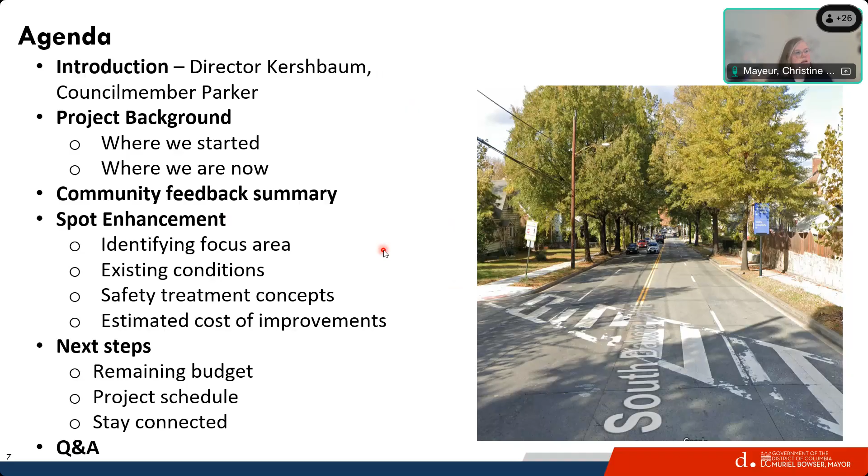We will have a public meeting—if you'd like to come in person and discuss some of your comments there, that will be Saturday at Perry Street Prep, from 10 a.m. to noon. Same presentation in the morning, but we're going to keep it a little bit shorter so that we give people more time to speak at each of the boards and look at the information in detail.

So where we started: in FY24, Councilmember Parker earmarked local capital budget funds to develop specifically a road diet, and recommended two segments that DDOT look at. Through conversations with the council member in fall of 2023, we recommended to study the entirety of the corridor for the feasibility of a road diet, considering that we had $1 million from that initial fund, and then received another $300,000 in FY25.

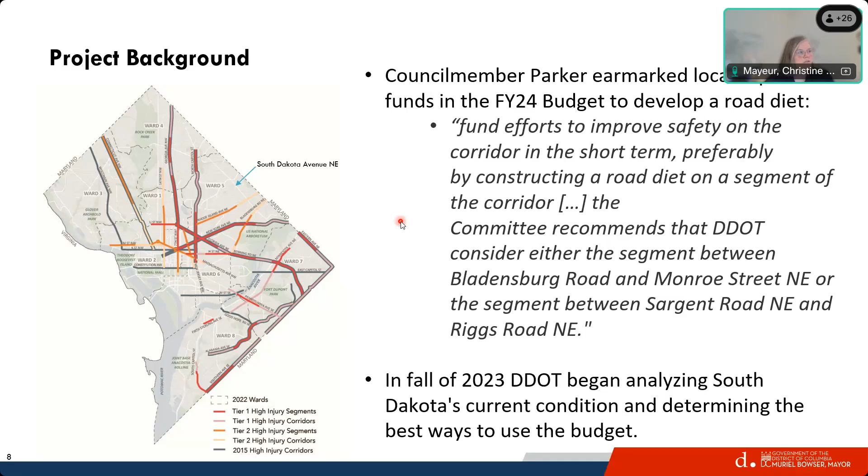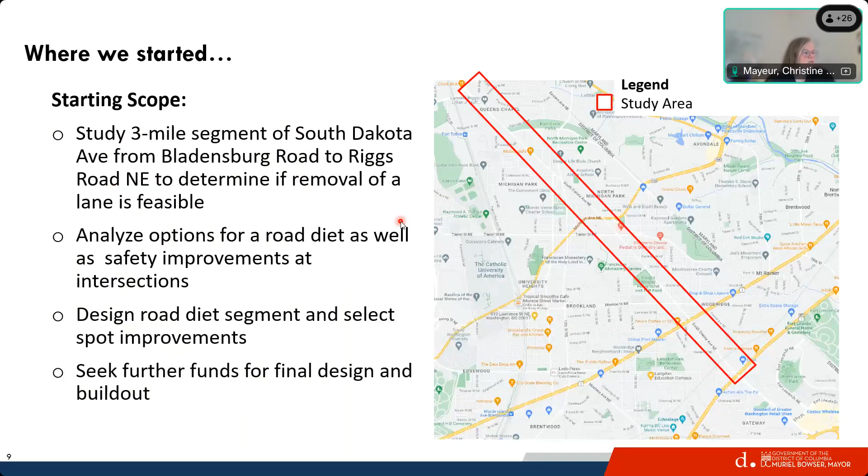So where we started was to study the entire three miles from Riggs Road all the way down to Bladensburg Road, to determine if the removal of a lane was feasible—to look at the road diet options for repurposing that space, then design a road diet for that segment and spot improvements, and then seek further funds for any further build-out.

However, things have changed. There's been a lot of disruption with DDOT's budget and DC's budget overall, so there are no additional funds coming to this project. We had to pivot to the best options and best outcome for this project, and really focus on spot improvements. We did finish the road diet feasibility study—we covered that in our phase 2 public meeting, and that recording is on the website as well. So if you'd like to hear more about that, we won't go into detail tonight, but we will be focusing most of our time on the spot improvements and how we can use this additional $600,000, or the remaining budget of about $600,000 that we have for this project after we complete this phase of the study.

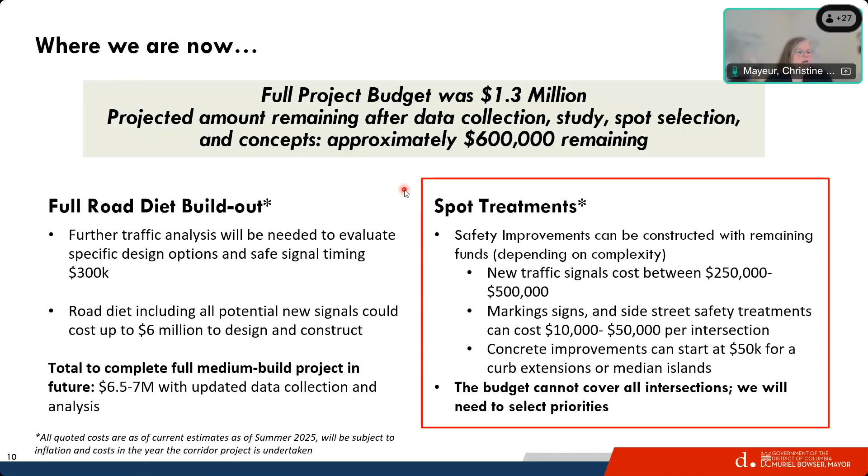So throughout all the feedback we've gotten from you all, we've received over 2,000 comments—about 850, and even more at this point I think, on the interactive map. Over 1,200 comments on feedback forms, 75 additional letters, and 144 responses on our top safety improvement spot location survey that we had from last time.

So overall, there was a strong demand for traffic calming and measures to improve safety, with speeding being a major issue, and a lot of people commenting on crash frequency and the risks of the corridor.

Pedestrian and bicyclist accessibility, the need for better sidewalks, crosswalks, intersection safety, concerns over how drivers are behaving when they're behind the wheel traveling on South Dakota and through the neighborhoods to get to South Dakota. Crossings feel dangerous for people walking. We looked at some solutions there for better visibility, signalizing intersections, or studying for signals. At first we were considering protected bike lanes, but that's no longer on the table for this project.

People had a vision for a multimodal corridor. We heard a lot of people wanted more sustainable features with the corridor that focus on pedestrians, on cyclists, on transit users, on trees and streetscaping and things like that. Many were envisioning South Dakota Avenue as a healthier urban place that supports many travel modes.

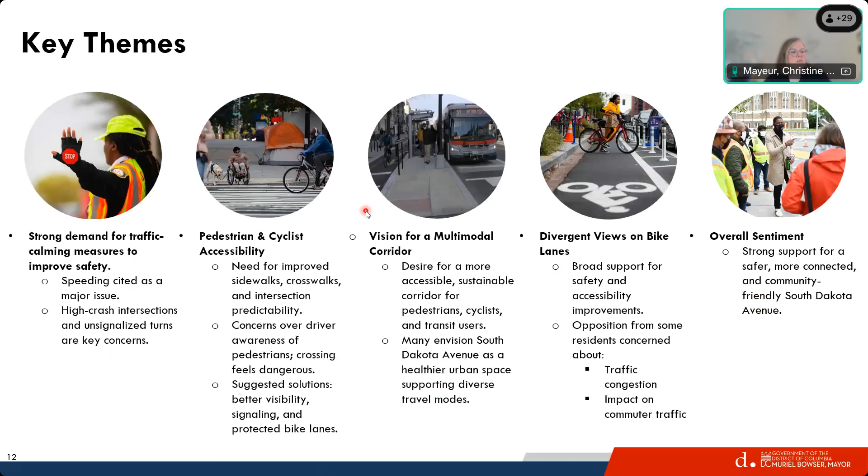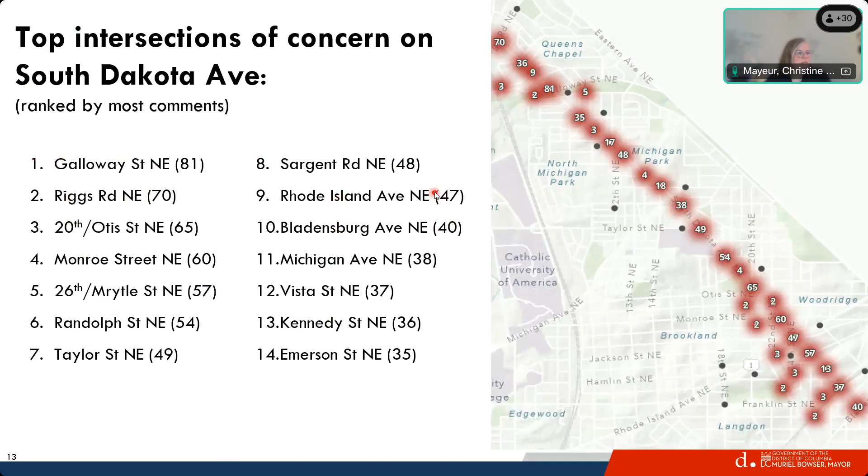From the interactive map that we launched at the beginning of the project, we saw the top intersections here - these are the top 14. Number 1 was Galloway with the most comments, then Riggs Road, and then some of these others. Bladensburg and Rhode Island Avenue are our high injury network intersections. Those didn't receive as many comments, but the ones that we got recognized that it felt very dangerous to operate through there.

So how we've used this information that we've gotten so far - we've looked at the comments that we've gotten from you all, crash data, and collected all new data from beginning of this year, before the government shutdown, to determine our spot location priorities, looking at selecting countermeasures to address the issues that you all have noted and also that we've seen from our data, and analyzing those spot improvements for even further prioritizing those locations.

Because we only have $600,000 left for this project, we won't be able to get to even the ones that we show you, all of them. We won't be able to get to all of these locations with this budget, but we will get to as many as we can with the budget that we have, and then await future budget to build the rest.

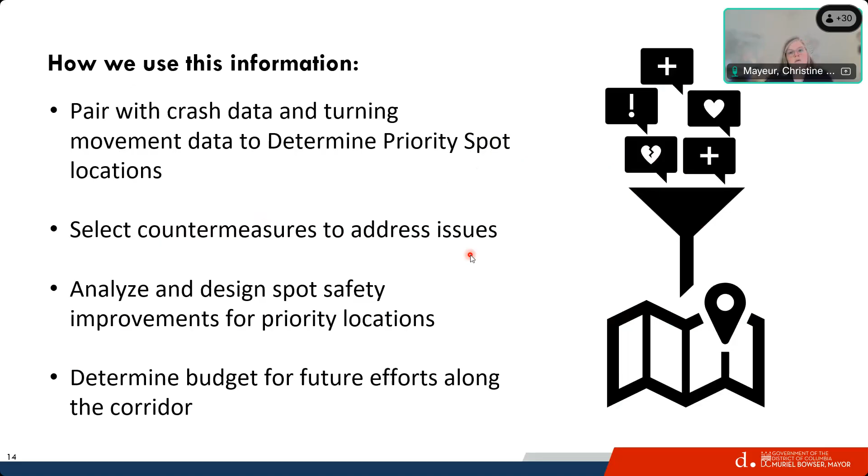So with that, I'll get into our spot enhancements that we have been looking at. We identified these focus areas - if some of you attended last time, we identified multiple. We're going to focus on our top 5 locations since then.

So prioritizing high injury network intersections - these are the locations where there's a demonstrated history of many severe and fatal crashes. Really, if we can improve safety there, that goes a long way for the corridor as a whole. Intersections with high crash rates based on recent traffic crash data. School zones, especially around Perry Street Prep, Sojourner Truth School in the middle of the corridor.

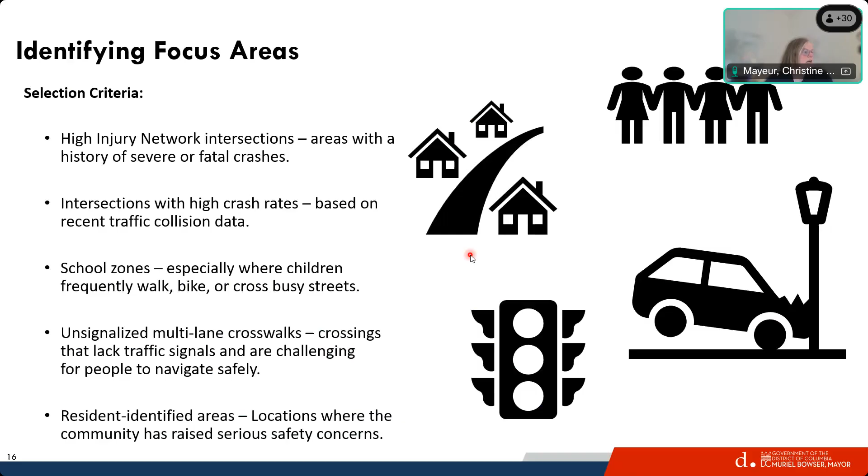Looking at crosswalks that have been unsignalized, that are uncontrolled, but still cross all 4 lanes of South Dakota, or 6 in some cases, and any locations that you all told us were priorities, like Galloway and Gallatin.

So these are our top, in order of priority, focus areas that we'll be covering tonight. The top one is this intersection here, number 1, with a short segment from Bladensburg all the way up to Hamlin Street, from Rhode Island up to Lawrence Street. Then we go up to Webster to Taylor Street, this segment here around Michigan Avenue. Our number 4 priority is around the school from 18th Street down to Otis. And then our 5th priority is Galloway Street and Gallatin up here. So I'll go ahead and walk through those in order of priority.

So we'll start with Bladensburg to Hamlin Street. This is existing conditions and a summary of what you all have told us so far, including any of the data that we've looked at and evaluated for the project. In blue is what we've found from our observations, from our data. In orange are things that you all have noted on our interactive web map.

So here we saw a lot of crashes around Vista, a lot around 30th and down at Bladensburg and Franklin as well. This one down here, Bladensburg, is a high injury intersection, really high levels of volumes turning at this intersection.

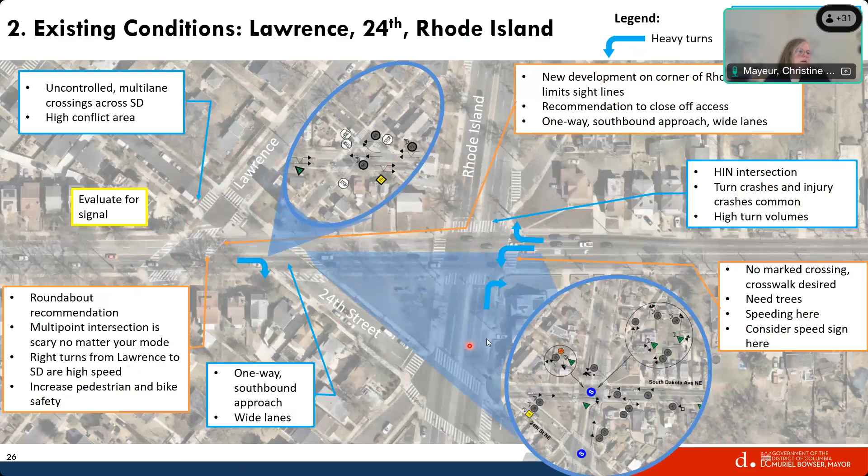So looking at also Rhode Island, any new developments that are coming in, safety of the intersection down here at Rhode Island as well.

So what we came up with for Lawrence, 24th and leading down to Rhode Island, but we'll focus Lawrence and 24th right now, is really trying to manage access across, especially uncontrolled turns across South Dakota, which lead to pretty severe crashes for drivers especially, but also for others. So preventing left turns here with a striped median.

And some flex posts lining the entirety of that median space. You can still make the right turn up here as existing conditions, northbound South Dakota Avenue up to 24th Street. But you would not be able to make the left turn out of Lawrence on either side. And you wouldn't be able to make the left turn from South Dakota onto Lawrence either.

For 24th Street southbound, we're looking at adding curb lane or parking lines to really reduce the visual width of the roadway and hopefully help reduce speeds for people making the right turn from South Dakota south on 24th Street.

Again, here at Rhode Island Avenue, treatments are a little bit lighter, but visually narrow 24th as you come through. A lot of residents complained about speeding here, and we observed it as well. And then down on the northbound approach to Rhode Island at 24th, enhancing the visibility of that intersection with daylighting as well, reminding people of the speed limit here.

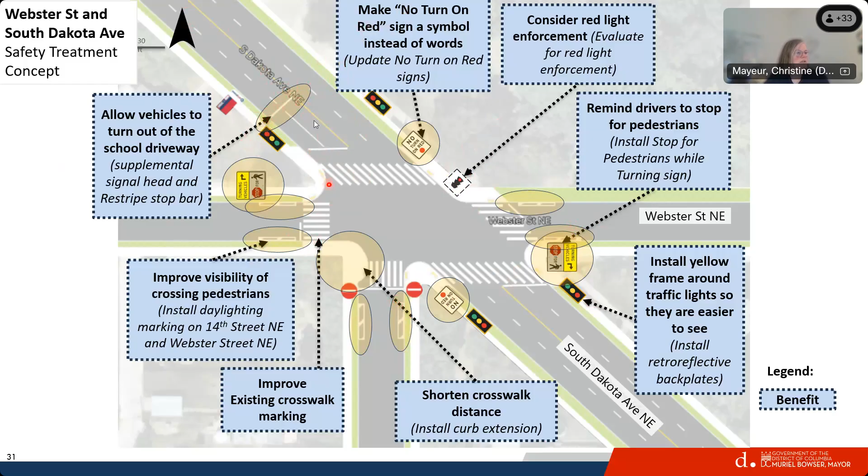And then another one here is the driveway that comes out of the school, adding a supplemental stop bar so drivers coming southbound know where to stop appropriately. And then the folks coming out of the school have some space to get into the southbound queue to get through the signal there.

For Michigan and South Dakota, we've got a couple of recommendations here that change things up due to all the comments that we received. The main thing is to close off the 16th Street slip lane. So you won't be able to make that shorter right turn here. We will close that off, and then you'll be able to make the right turn at Michigan and South Dakota.

But that also means 16th Street, we were recommending to one-way that away from the intersection. So if you're going northbound, you can still make a right turn onto 16th Street, but you won't be able to make a southbound left to get onto South Dakota. You'll have to go up to Webster, and we're hoping to point people to signalized intersections to make these turns.

This will also simplify the intersection so that we see fewer crashes and it feels safer for everyone out there. We're adding a leading pedestrian interval, where pedestrians get a head start across the intersection. And if we're one-waying this location, we're looking to reconfigure and remove the traffic light here.

At Taylor and South Dakota, we came up with two concepts. This one is a lighter touch, really focuses on visibility treatments, giving pedestrians more time to cross, no turn on red, switching out the signs to make sure they're very readable for everyone, and reminding drivers to stop for pedestrians.

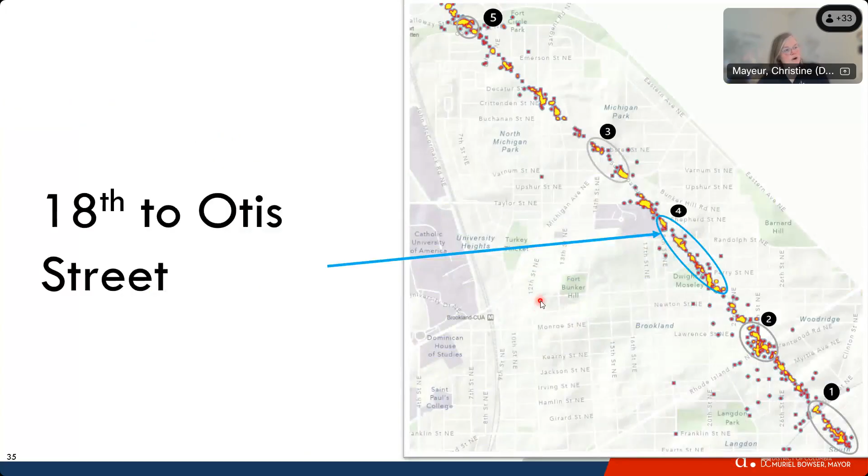This segment from 18th to Otis Street is really focused around the school. In existing conditions, we heard a lot of pedestrian crossing issues here at 18th and Shepherd and South Dakota, and a lot of turns happening all around the intersection. We also see a fair amount of crashes here, especially heading southbound, side swipes, and people trying to get in and out and weave through lanes to get to where they need to go.

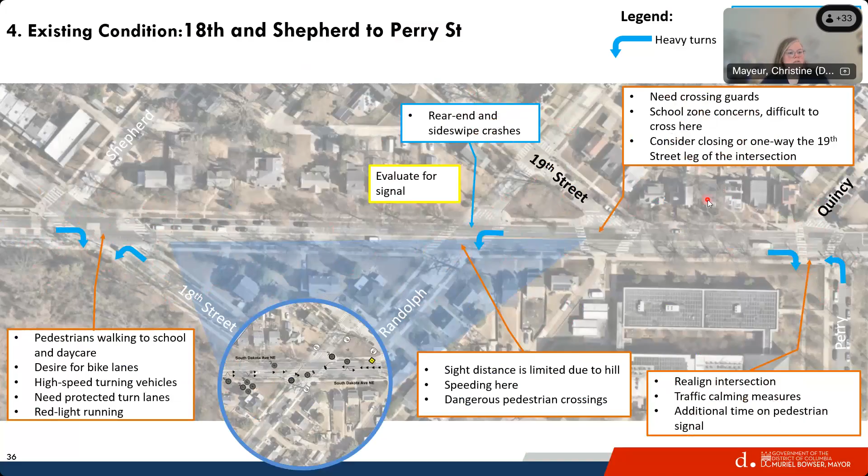We also heard about sight distance limitations at Randolph and South Dakota, and saw there were many rear end and sideswipe crashes there as well. We received requests for crossing guards, school zone concerns, requests to realign the intersection down at Quincy and Perry, and add additional time for pedestrian crossings.

Starting back up north at 18th and Shepherd, we're really focused on the pedestrian crosswalks, trying to shorten those as much as possible with curb extensions, and restricting left turns from northbound South Dakota down 18th Street when you could make a more visible and easier turn down at Randolph Street. With this, we're also recommending a protected, dedicated phase for northbound turning left traffic to get onto South Dakota from northbound 18th Street. With that reconfiguration, there may be some additional delay, but we'll dive deeper into that with our specific community meetings.

All across the corridor, if you've seen these, they're usually on the center line and meant to slow down turning vehicles, so that people are making a slower, more visible turn, and they can see people crossing as well as other drivers.

Randolph 19th. So here, a lot of what you've seen before: daylighting the intersection, turn calming here to make sure people are making more intentional left and right turns, and shortening crossing distance as well.

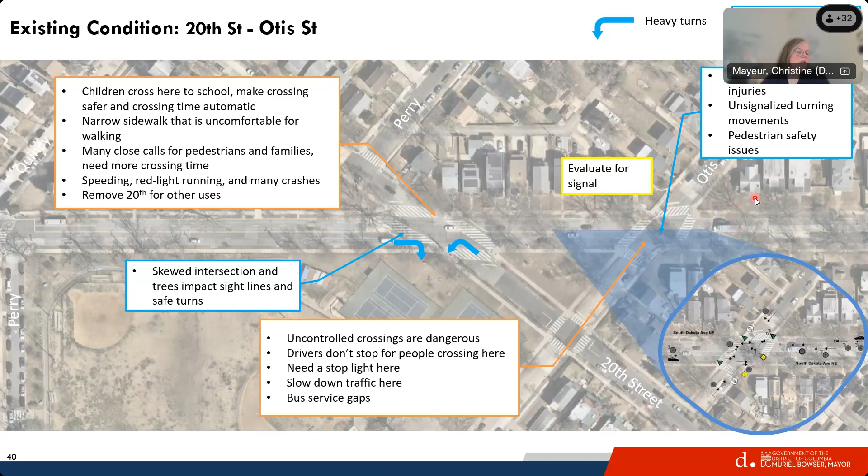These work together, this slide and the next. We have the proposal here to prevent northbound right turns from 20th Street. That's another really difficult turn to make, especially for larger vehicles, and it can be challenging to see pedestrians and react in time because of that sharp right turn.

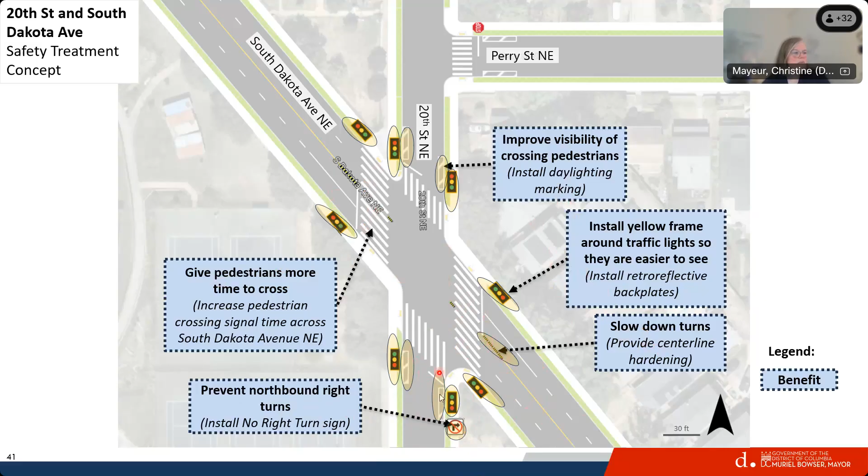Preventing right turns from northbound 20th Street gives more time for pedestrians to cross at the intersection, and putting in turn calming really prevents fast turns and people cutting the corner to make their turn quickly. Down at Otis Street, we have two options as well.

For Otis, we would recommend center line hardening and restricting left turns onto and out of Otis Street, based on the comments and data we saw from crashes. So there are two options for that.

Same thing if you're heading northbound on 20th Street: since we're restricting the right turns up at 20th and South Dakota, you can make your right turn here at Otis and continue southbound. Also increasing lighting here and adding rapid flashing beacons overhead.

All right, our last location: Galloway Street and Gallatin. This received the most comments from you all, and we also saw a lot from our data and reviewing crashes. What you told us is to study it for a traffic circle, to create connections to the MBT and ART trails in the area, that there are aggressive drivers here, sidewalk gaps on Galloway, but also frequent red light running and a lot of buses moving through to get to the metro station.

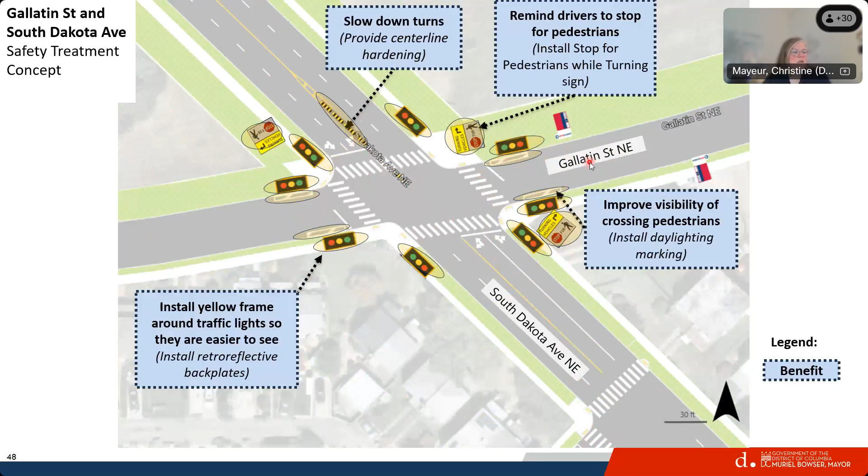Down at Gallatin Street, these treatments are really just basic safety improvements. We can investigate further turn lanes here, but for the most part, the visibility challenges are really crucial to address first and foremost. So making sure people aren't parking right up to the crosswalk, that the signals are visible, and that we can slow down people making turns that would previously make them very quickly.

Okay, so that is the spot locations that we have prioritized. We will release more as we get through, but those are more recommendations. We wanted to focus on these top 5 with you all because those are the ones that we could feasibly afford—most of them, or at least some of them.

I wanted to go into the cost of improvements so you all are informed when you're making your decisions, when you're taking our feedback form. So the treatment at Galloway to Gallatin—these are kind of ranges, depends on when we get to them, the cost of labor and materials and so on. But a construction estimate for the proposal at Galloway and Gallatin is about anywhere from $70,000 to $80,000 with the signal changes that need to happen.

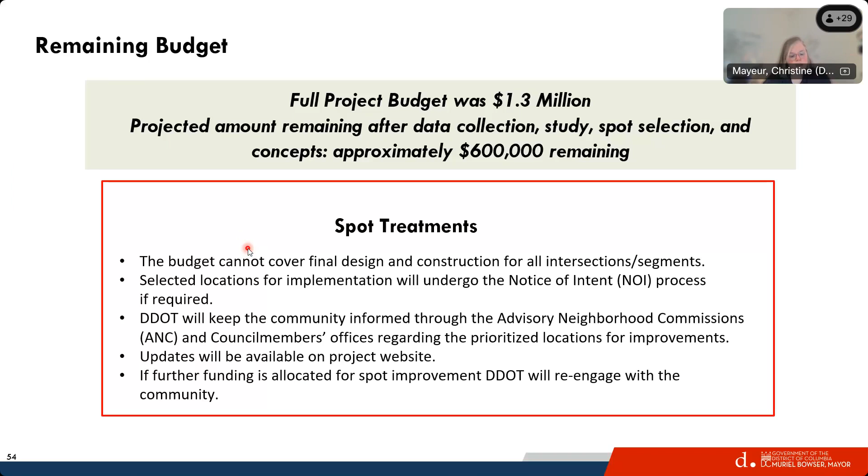We will have further, more detailed meetings with ANCs and local communities around the sites that we are prioritizing. So future conversations will be focused on those areas. And then we will issue NOIs once we get to final design decisions there.

So this is where we are. This is our third round of public meetings, looking at spot improvement concepts and looking at our prioritized spot improvements. We should have our road diet feasibility report on the website if you'd like to dive a little bit deeper into that and recap where we've been.

But looking forward in spring and summer, we will be looking to spot improvement, final design, engaging specifically with ANCs and local areas around those spot locations to get into the details, finalize those designs for the priority locations, send out notices of intent through the ANC, the council member, and so on for those spot treatments, and then move into construction, hopefully with those higher priority ones.

As budget cycles renew, we'll always look for new funds and new mechanisms to build those remaining top 5 as funding is available.

All right, we have a feedback form. This is on the left side of your screen, the QR code here. We want to know what you think of what we're proposing. Do you agree with our priorities? Would you like us to look at others in our top 5?

On the right side of your screen, that's our South Dakota Avenue project website. You can find everything from where we started, all the recordings of all of these public meetings, all the materials that we've mentioned tonight. You'll find that there. You can join our mailing list as well, and then you can also sign up for the council member's mailing list if you're not already on it.

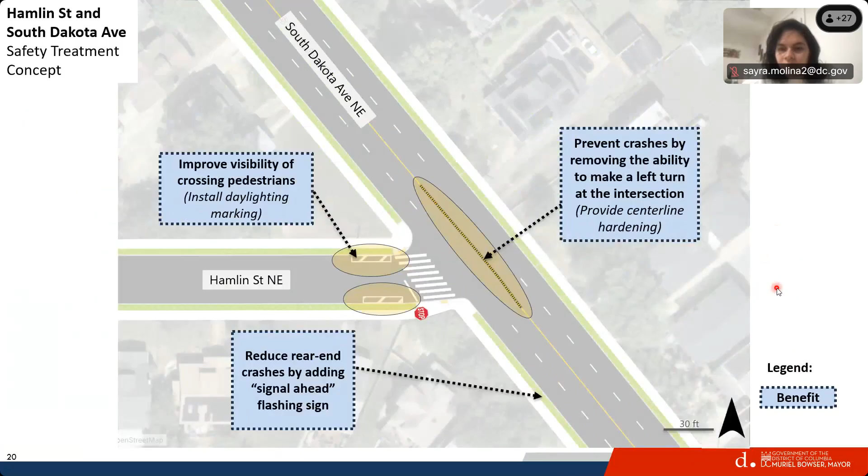There's traffic in both directions. You've narrowed the street for crossing, and all of a sudden they can't get out. I'm talking about coming off Franklin Street. I live near, on South Dakota, and I can see 30th Street across from me. I'm on the corner of South Dakota and 30th on the east side, but the west side is the 30th Street that comes out on an angle. So my concern is that narrowing a lot of these side streets impacts emergency vehicles. I've seen them try to come down South Dakota Avenue when people have parked too far out into the street, and they're having a hard time getting down there to the homes near Central Avenue.

So I think you need to look at the way in which, I do understand pedestrians need to have an opportunity to get across the street, and you want to make it as safe as possible. But at the same time, you have to take into consideration emergency vehicles. There's an older generation out there, people older than me, and they may need an emergency vehicle to take them to a hospital. They're not going to get to a hospital if the traffic is all backed up and you're down to one lane, especially in the morning.

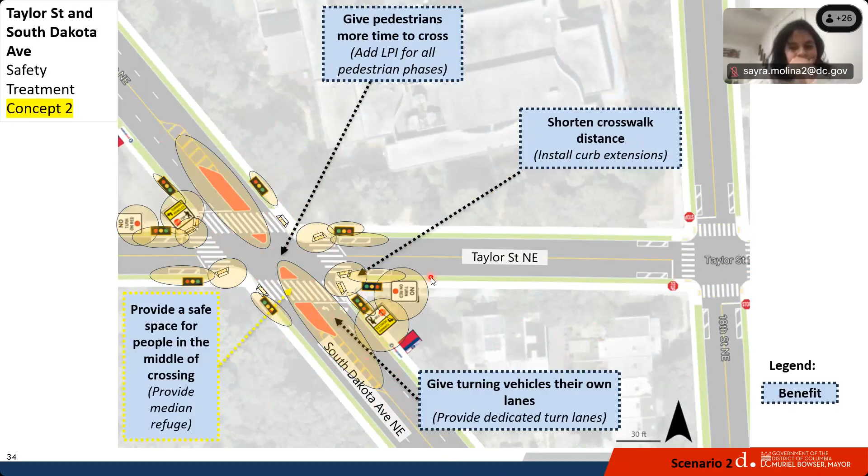I do appreciate the detailed maps so you can visualize everything. That's very helpful. The one that's closest to my area that I wanted to specifically ask about, my question I put in the chat was, can you elaborate on the difference between concept 1 and 2, which was South Dakota and Bladensburg? So there were two different concepts. If you could just say more about what are the pros and cons of those two concepts, because that will become before our commission.

And the other question I had, and this is just general, in some of the projects I was trying to follow as best as possible. Some of the lanes, when we have on the intersection—this is not in this presentation, but on Eastern and Rhode Island—there's lanes, so you have a left turn only, one straight lane, and a right turn only. So there, it's actually caused left turn onlys. Really, I do think are helpful, even if it does keep things moving, and you don't have to make those dangerous, like get out there and make the left turn.

So I do appreciate that. But having only one pass-through lane and then the restricted right lane, the traffic backs up. So just looking over in South Dakota, is there consideration for when you have backups, not being able to have cars flow?

I did hear you may have a dedicated left in one place. I don't know if any dedicated rights, but that's an intersection that sometimes now backs all the way up to Bladensburg Road when it used to not be there. I want your thoughts on that, because we do appreciate the dangerous left turns being addressed, but also the ripple effect of backup when there's no flow-through traffic on a lane.

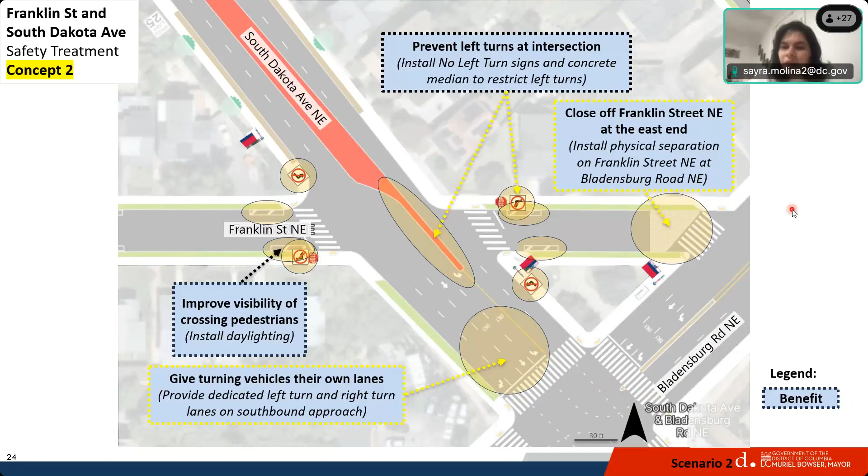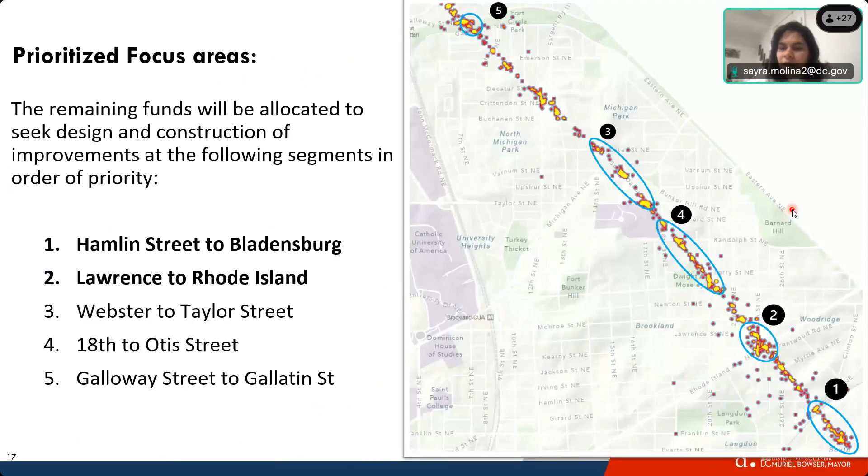In the Q&A, Evans said for Galloway Street, there is no longer a bus stop on the south side of Galloway. I assume that's the one you're talking about removing. Metro removed it as part of their network redesign, though plenty of residents would like it back. There's still a bus stop on the north side heading southbound, westbound. Okay, great, that's good to know, thank you.

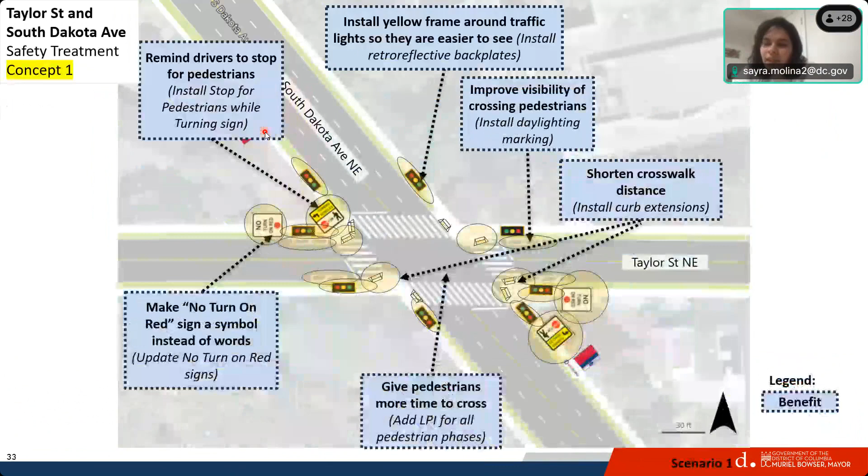So I noted that we're prioritizing the top 5 intersections that have high crash numbers and also other safety concerns, and that's within our high injury network. If additional funding becomes available, we would take a look at other areas. And even with these 5 priority segments, we can't commit to constructing every single one or taking every single segment into design and construction.

We are only able to do what's available in our funding. I did note that you acknowledge those constraints, and we appreciate your good ideas.

She said she just thought school zone criteria would apply for some stretches near the school, not just an intersection nearby—for example, students crossing from the bus stop across South Dakota Ave that isn't covered here. The school she speaks of is near Webster. We're touching that intersection, but not the rest of the school zone for that school.

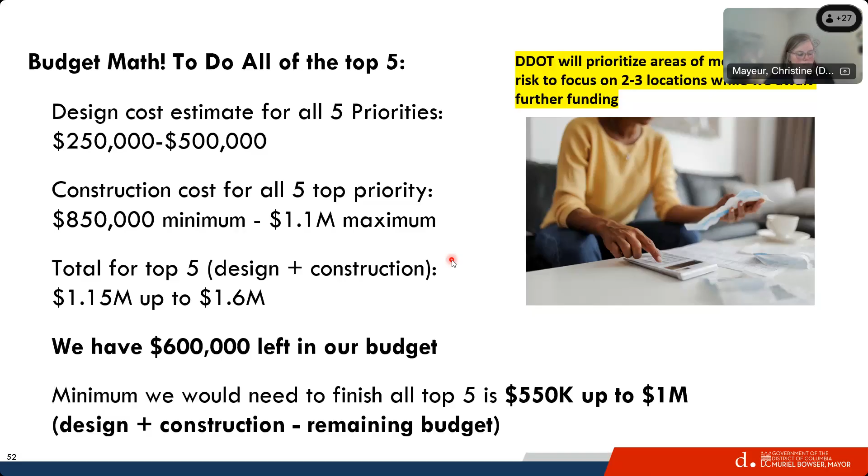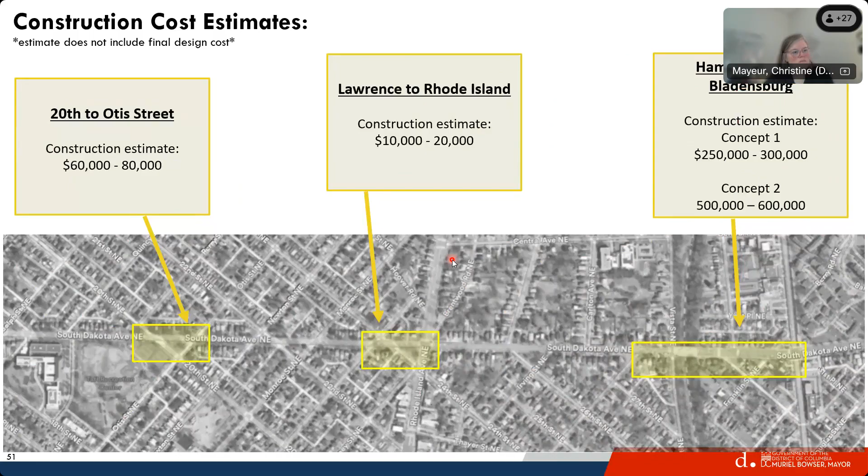The other thing I'm thinking about is on the east side of 30th Street. People come down Bladensburg Road to try to avoid the light, cut up to Central Avenue, hit 30th Street, and they're flying up 30th Street to South Dakota Avenue so they can make the right turn in the morning. A couple times it's been dangerous, and just like when I first moved here, we still have kids in the neighborhood, and a lot of them are walking to school.

They're flying their cars up the road. Is it possible to put some speed bumps or calm the traffic? On 30th Street, or maybe Central and 30th, too, if the people on Central want that, but I'm just talking about 30th Street. So let me go back to 30th.

We had recommended some speed humps for 30th Street as part of our treatments there, so yeah, that was definitely something on our minds as well. That was in what we were looking at.

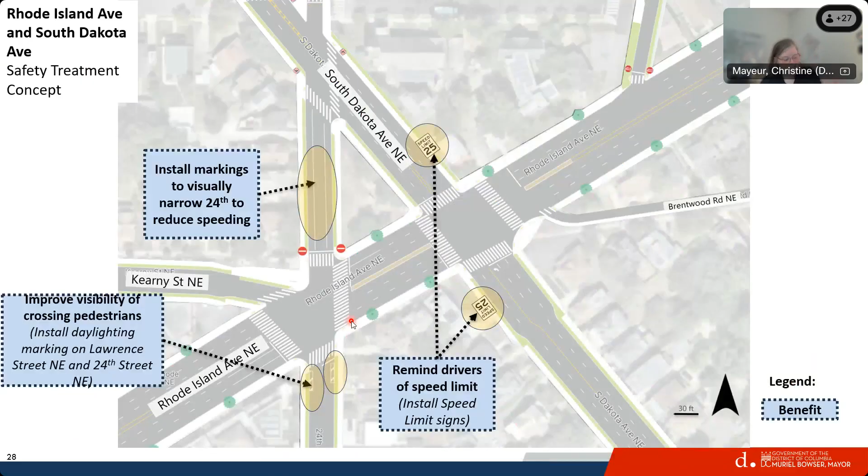Yeah, thank you, thank you. Okay, any other questions or comments?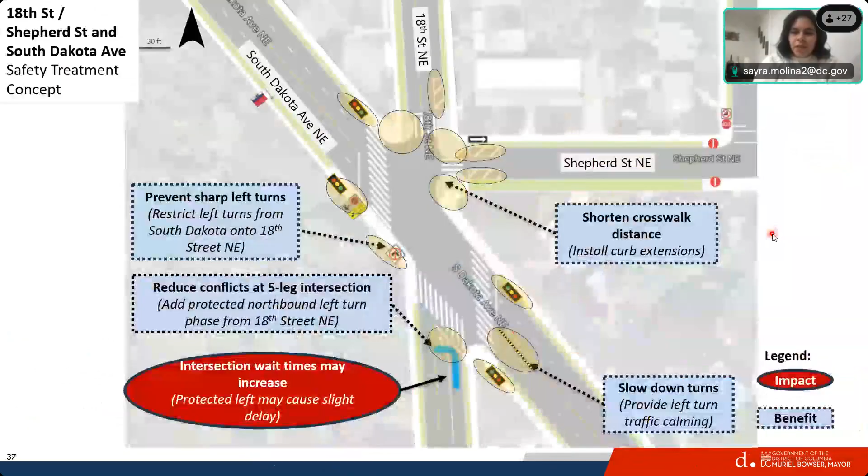The survey asks if we answered all your concerns, and do you agree with the top 5 priority locations? And if no, what other locations would you want us to consider? Also, if there are additional funds available. So if you could take it and also tell your neighbors and promote that survey, because we do a survey for all of our meetings, and we do take a look at that and consider it as we move this project forward.

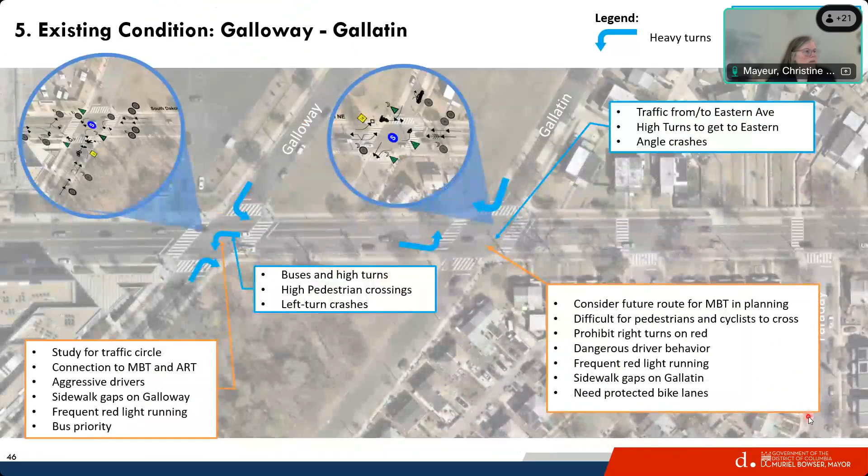Yes, let me go back to that slide. So there's 2 options there. The second one with the signal, we didn't get to that because we haven't confirmed yet that that is a viable option, but let me get back up to that. It's page 22, for Franklin Street also. Okay, gotcha.

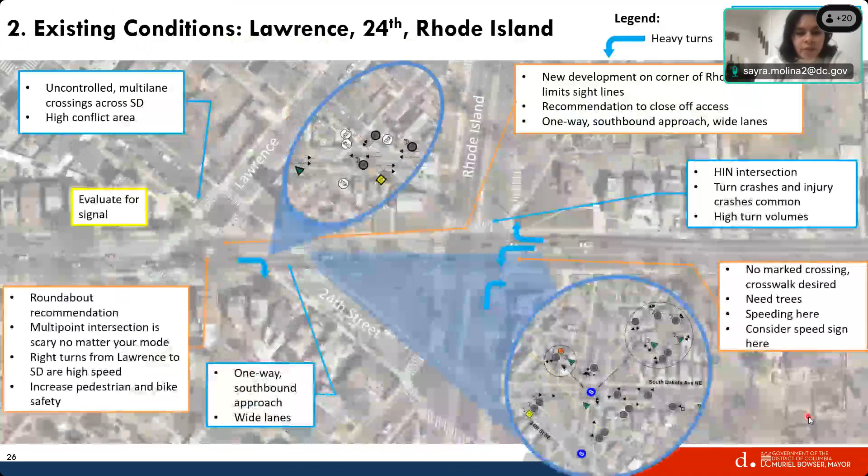Actually, it's 30th Street. Yeah. Okay, yep, very good. Okay. Alright, so, go ahead.

So this is the option if a signal is not warranted here, where we saw a lot of crossover crashes. Our proposal would be a solid median here with overhead flashing beacons for pedestrians to cross. If a signal is warranted here, then it would be open access, so people could make turns under controlled conditions with a signal, safer turns and safer movements through the intersection. So this would not look like the same option if there's a signal that passes our tests. There are federal requirements for signals for installation, and we're still taking this through and confirming that it meets them. If it doesn't, it may look like this. We'll work with the local ANC and community, but if it's a signal, it'll have a different design.

Okay, right, and that was what I was thinking. I understand the regulations and funding issues with regard to this becoming a controlled intersection. But that was the reason for my question, because that doesn't exist currently. I'm dealing with what exists here and what you all are presenting to us. This is what you're proposing if this doesn't become a controlled intersection. And even if it does, I'm sure it's not going to happen within a projected time frame like next spring. So am I to understand that this is what can be expected until or if that controlled intersection comes about?

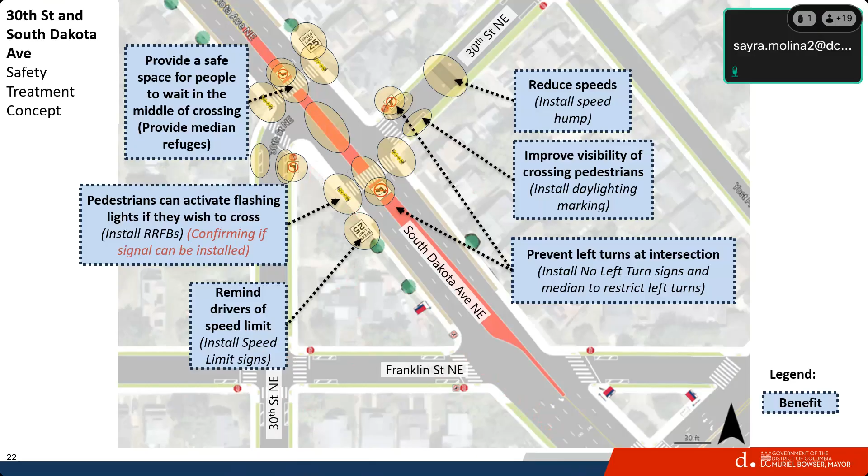And this QR code for the South Dakota Ave website, I fixed it. It's a new QR code. I dropped the link for the website in the Q&A, so you can grab it from there. And then we'll make sure to update it on the slides as well. That was my only question, I scanned the QR code, so I just wanted to make sure you saw that. Okay, thank you, yes, thank you.

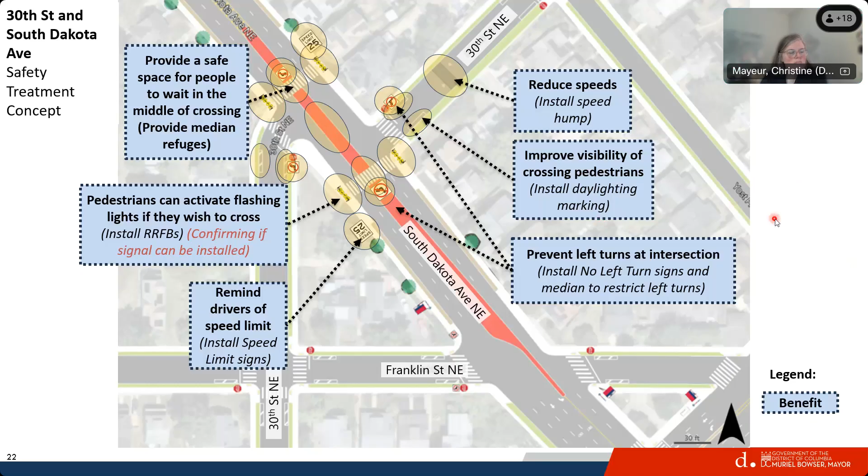Okay, sorry guys, just in closing, I wanted to add to my last comment. It's extremely imperative about the median, because the primary issue, which is even leading to speeding, it's a domino effect. When you create traffic calming in one area of a thoroughfare or roadway, it creates hostile driving by motorists, and it spills over into other areas where there's reckless driving, people driving hastily because they're trying to make up for lost time. That's why I brought up the issue of the impact studies.

I understand everything that you all are proposing and the motivations behind it, but you really have to consider the ripple effect, like Commissioner Dunson and Ms. White both expressed earlier, because a lot of the things you're proposing are going to be undermined just a little further up the road. Do you get what I'm saying? Yeah, yeah, I understand. I don't mean any disrespect, but it just looks like everything being proposed is just creating another, if not worse, problem just a few blocks further along.

Yeah, I hear you. Not to mention the side streets, etc. We already talked several times about this, the spillover on the side streets in residential areas. So I'm not even going to delve into that because we already know about it. But that's the point I'm making.

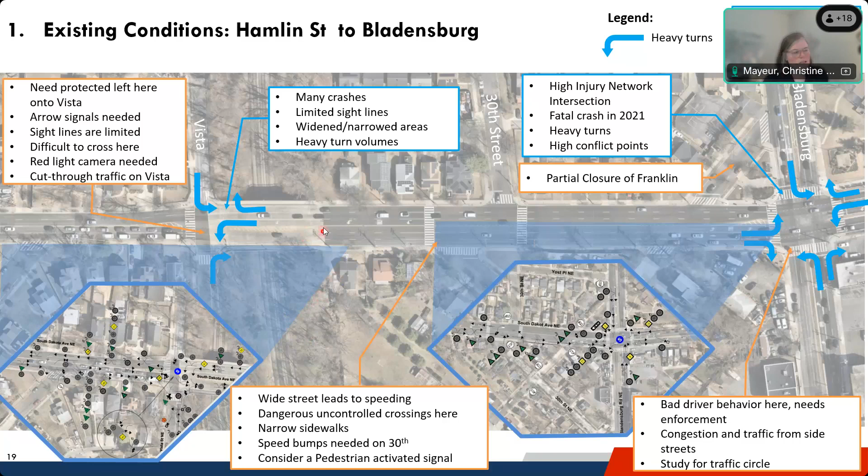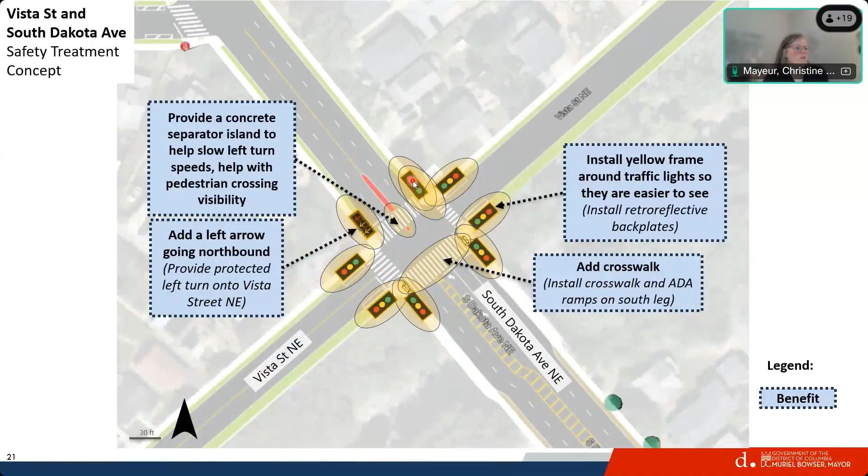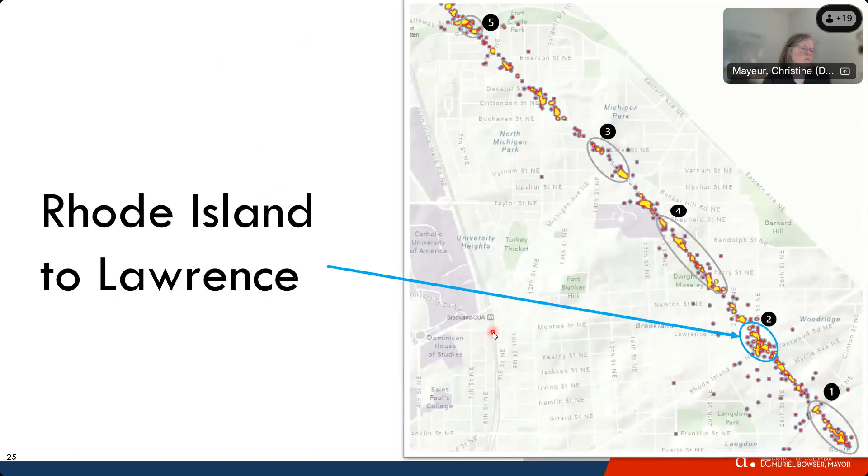If we're trying to promote safety, that's the concern. I'm concerned that we're going to miss the mark on our goal. And the data shows that since implementation of a lot of these measures, there have been increased collisions as far as motorists, pedestrians, cyclists, all the above. So we really got to look at that.

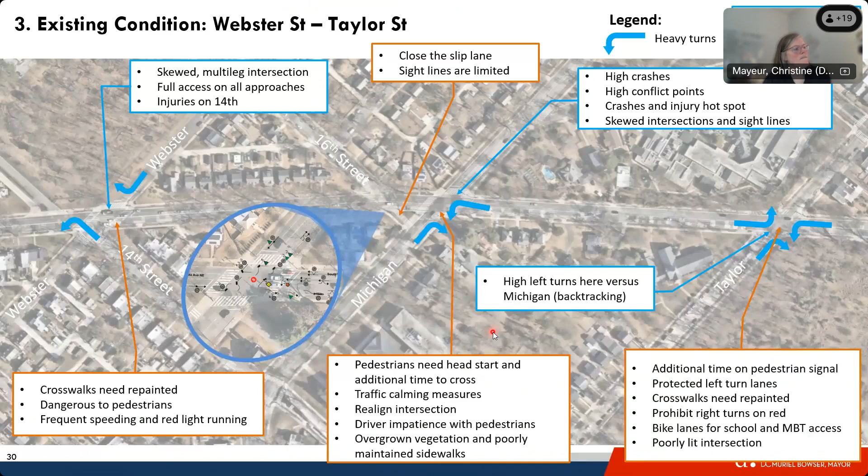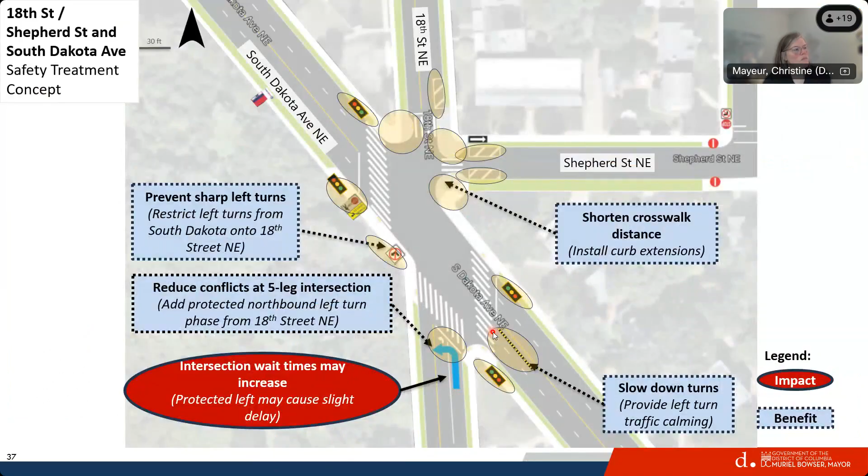One last thing: a lot of these measures that have been implemented have had to be revised multiple times. So that's money being, I don't necessarily want to say wasted, but having to be spent over and over again on the same area.

For sure, and we understand the concerns. This has been an extensive study that we've done on South Dakota Ave. If we had the capacity to adjust the whole corridor holistically, we would, but unfortunately funding is constrained. So we are doing the best that we can to address the concerns we heard from the community.

One comment that comes to mind as you're saying that: there's going to be issues that come out of the safety improvements we're recommending. One resident made a comment on the comment map, which I invite you to take a look at—over 800 comments. They stated that the current state of South Dakota Ave does not meet our standard currently. There are issues at hand on South Dakota Ave.

Kids and people have stated that they lived on South Dakota Ave and they're scared to walk on the sidewalk, scared to cross the street. And so we are here listening to the residents, including yourself, to try to figure out the best way to address the concerns brought up by the community.

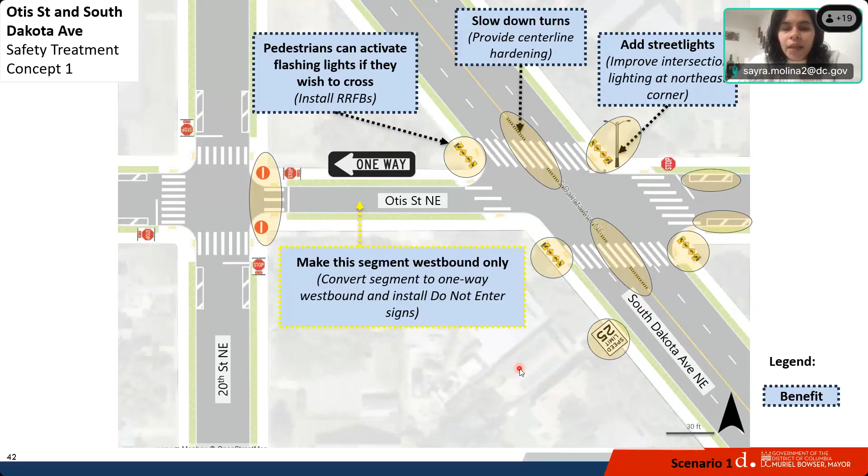If the concepts we're presenting may need some alterations, we're happy to work with the community impacted on what will work. So these are concepts. We're going to go out to the community again to refine these concepts and figure out a design that will work to address safety for all users, because we have multiple users in this meeting.

People have said kids are crossing South Dakota Ave. So one concern is congestion, and the other is safety for the kids crossing the street to get to school, to get home, to get to parks, to get to the bus. There's a lot of needs, and we understand that, so we'll try to address it as best as we can, and we look forward to further engaging with you.

All right, thank you guys. Thanks. Thank you.